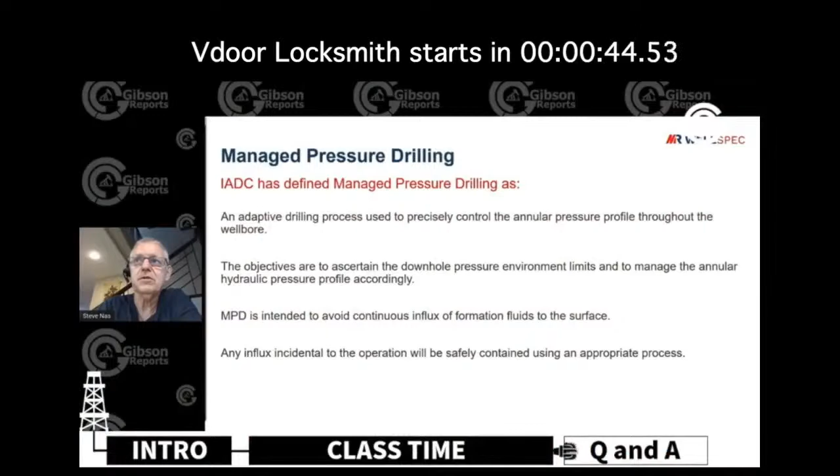The key is being transparent with our clients in this case. So tell them what happened. If we had a failure, tell them exactly what happened, whether it's our fault, whether it's whatever the issue was, we need to be transparent.

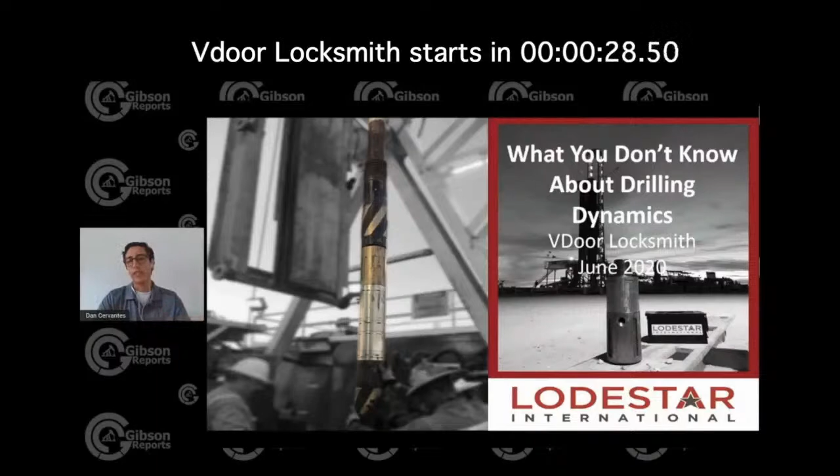I think it's very important for everyone in the industry to know what's out there and kind of what's happening downhole as well. I've probably worked on over 40 different performance limiters in my career.

Here's your new colors, here's your new thing. We don't do that at all. Here's the tattoo you need to get. Yeah, here's the tattoo. Sorry about the last one.

We used to fake that all the time.

All right, there we go. And Fred, thank you for coming on the show today, sir. Good morning, I appreciate being here, really appreciate the opportunity, David. Other than myself, you've been on the show the most. Well, like you say, I enjoy this. It's a great opportunity to share a little bit of practices, particularly things related to limiter redesign.

So as far as the limiter redesign, I know that you're going to get into that, but what's a high level elevator pitch for limiter redesign for anybody out there that's just now being introduced to it?

The principle is so common, and we think we do it all the time. You improve something until something limits you from improving it, and then you address the thing that's limiting you, and that lets you improve it some more. Well, what we tend to do is look at things that are limiting us, and if they still seem normal, we don't do anything about them. So I'm at max motor differential, I can't put any more weight on bit, and I'll drill with that same motor for a long time. Or I've got an auger that plugs at 100 feet per hour on an offshore rig, so I drill 100 feet per hour and don't change the auger. The day I do, I'm drilling 300 feet per hour.

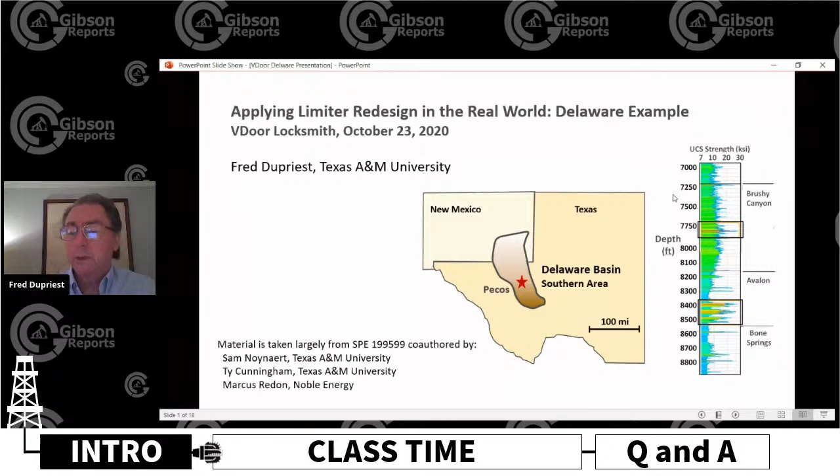But this was the prize when we started out: these hard streaks and the things that happen around them. So I'll be talking about the physics of these hard streaks some, because I think you need to know that to understand some of our conclusions.

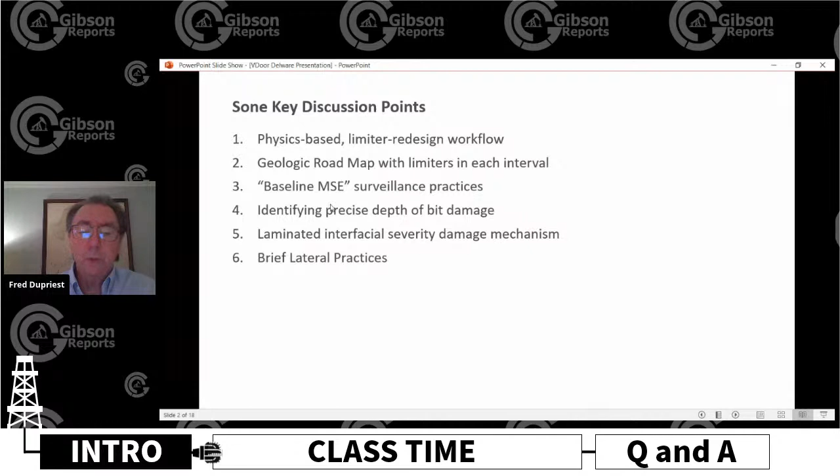So this is kind of an outline of subjects I'll go through—some of the key discussion points that we need to talk about in order to put a bow around this. So I start with the same slide, and I know you guys get tired of this, but it really is key to understanding what we're doing.

Physics-based limiter redesign is really wrapped around how bits really work. The way a bit works: if you apply weight on bit, the cutting structure indents, and then as you rotate, you remove the rock at that indentation depth. So weight on bit causes indentation—more weight on bit causes more indentation. That's why you drill faster. And rotary speed also increases how much you remove per minute.

At low weight on bit, we have some inefficiency, and I won't go into that, but we eventually get to a point where we actually do get a linear response between the weight changes and the ROP. So if I double my weight on bit, the ROP goes up proportionately. That straight line is saying to me, okay, I'm efficient—that's what an efficient bit does. So if I have a straight line response, I have an efficient bit.

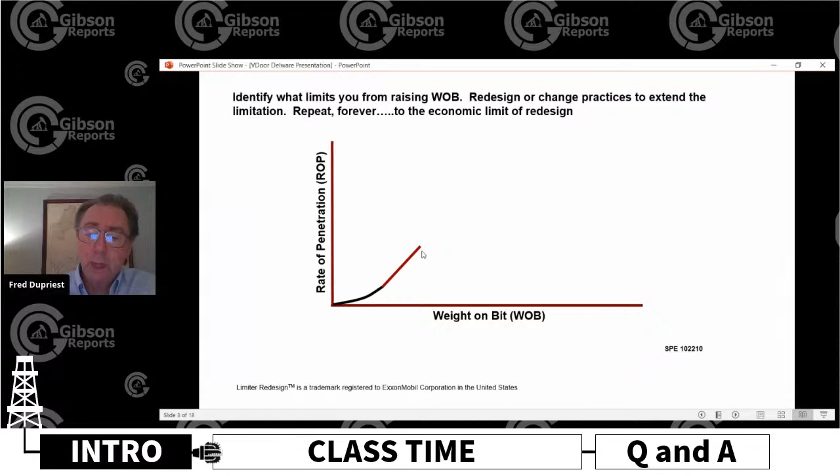We know at some point, keep raising weight on bit, and we don't get that response. That is not an efficient bit. So we know all the reasons for inefficiency—we've done lots of research, built practices. How does it work? What are the physics? What can the driller see? What can the engineer redesign? And we teach all that.

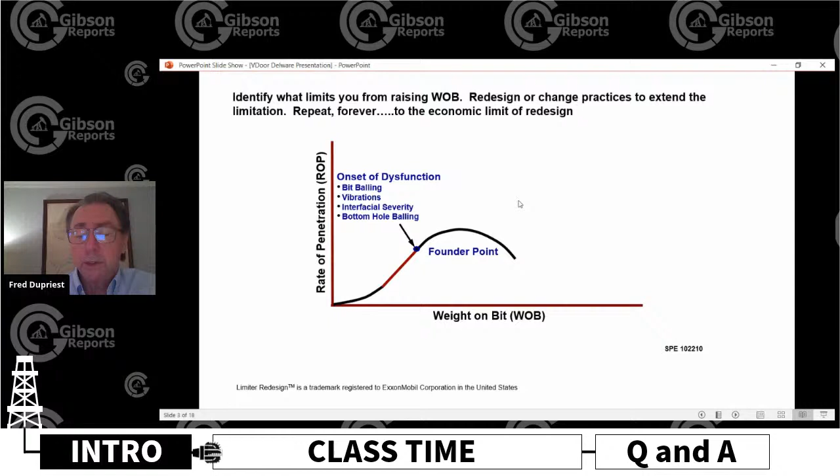And that's what every company, especially operators and general service providers, probably needs to be compiling in some kind of a very concerted program—an organized body of this—so they can teach an organized recognition and response. The bit should be doing this, which is beautiful. And we say, well, then to drill faster, you need more weight on bit. I need to change the weight on bit at which that dysfunction starts.

Now, this is kind of the classic shapes for bit balling. And what happens with bit balling: if you increase your hydraulic horsepower per square inch, you're still going to ball, but you might not do it until a much higher weight on bit and a much higher ROP. I had a case where we were balling at 120 feet an hour, changed that bit HSI, and we didn't ball until 500 feet an hour. So that is the idea of not fixing what's broken, but redesigning what limits me—that's a different question.

An example I use is, if you ask your wife what's wrong with our marriage, she might say nothing. But if you ask, what limits it from being better, she'd say, well, let me get my spreadsheet. So that's a different mindset.

Don't focus on what's broken. Don't think of it as broken. Just say, I'm limited by this, and dispassionately and non-politically record it, work on it, learn about it, go find some physics if you don't understand the bit balling, and you're off to the races.

As we do this, we can have all kinds of things that limit us, and everyone has its own physics. Some things the driller can see to decide to do a little better right now, and some things the engineer can redesign. The non-bit limiters, if you're offshore control, probably 80% of your footage, and the dysfunctions are a little bit less important to you.

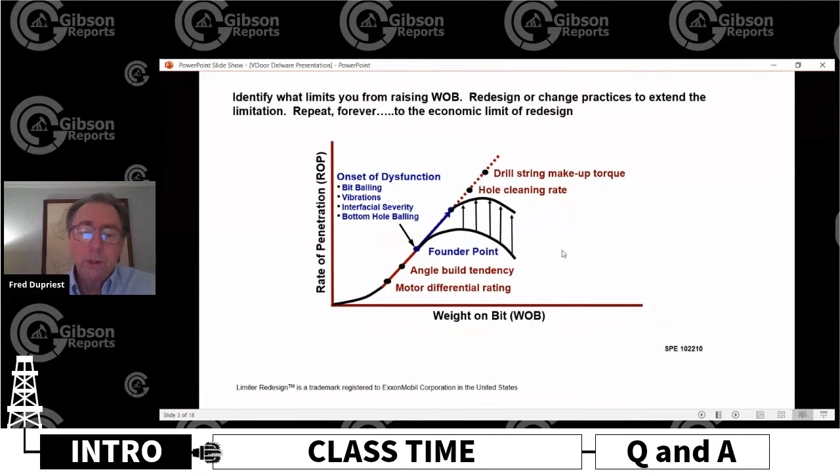Now, our management processes won't even focus on that. If something's not broken, the boss is not even going to want to know about it. So this is kind of a radically different thing to get people to go out and do this, just consistently and relentlessly, is a different way of working.

And that's where you start to see the need for a real programmatic initiative by the whole organization. Everybody has to kind of be part of inventing that, as it turns out. Somebody needs to pull the science and the practices and the physics into a pile, but you need to work with the entire organization because you're asking everybody to go to work every day and change how they work. And that's tough. We'll talk a little bit about that.

So this is the heart of limiter redesign. If I were in production, and we've extended this to other departments, I still need to find that magic question: what limits me from increasing the drawdown at the bottom of the well? Because I get linear production increases with that. And then from that, I just start increasing drawdown.

You get pretty profound and significant results because, again, I'm sitting there for years saying don't pull more than 1,000 pounds of drawdown on the screen in the Gulf of Mexico, and I just buy in and say that's normal. So it's kind of a general philosophical approach that tends to make a lot of money, but not an easy one to actually implement in an organization.

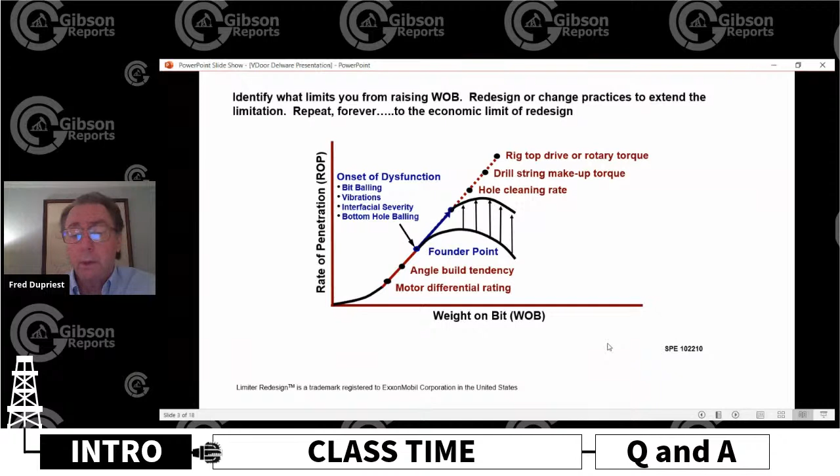Remember that if you have the bit off bottom, that's the first thing you've got to prioritize. So the model kind of accommodates reaming, circulating, and tripping. Each of those has its own question: what are you reaming? It has its physics, what caused that, and what can the driller see and decide, and what can the engineer redesign. They're no different. They should be part of your pile of redesign practices for all of these limiters that you run into.

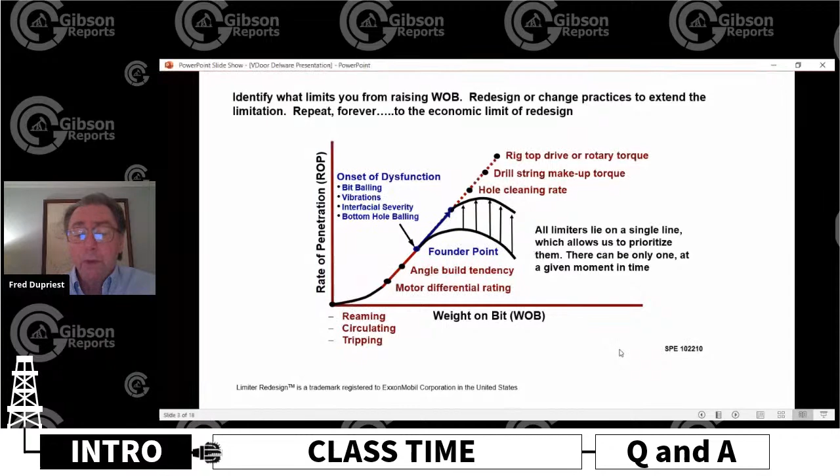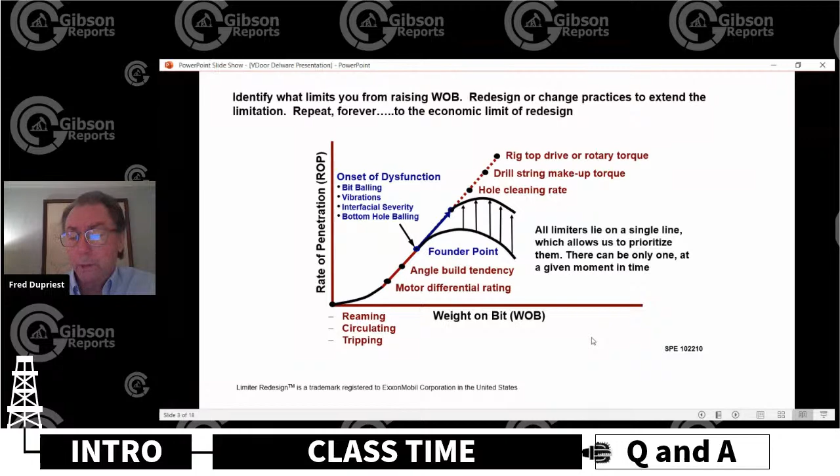The beauty of this is I can't be limited on any foot of hole by more than one thing. So that lets my organization, my well, my rig, my drill pipe, my hydraulic system, my rock, focus on what actually makes me money, whereas a researcher or a vendor has to generally try to make money. And it turns out there's a huge difference in the outcome in terms of performance if you can focus on every foot.

So I hope I don't lose anybody with all this philosophy before we talk some Delaware, but it's really important that your organization is not used to redesigning what's normal. And what we're really describing is a continuous improvement process, though I don't call it that because there's so much hard feeling around that term.

It is a plan, do, analyze cycle, like all continuous improvement processes. You plan to do something, you do it, and you analyze what happened, and then you plan the next one. What tends to happen is we plan, we do it, we learn a few things, and we make a change. One well, two wells, and now that becomes the new normal. There's so many things that just have become normal now.

If you look at learning curves in different fields, you'll see about a 10% improvement in a simple well—we don't have many of those. You'll see about a 30% improvement in a complex well before you hit that plateau, and that's where we have a lot of that out there. Yet there could be a 50 or 60% improvement if you would attack what's normal. So there's money to be made here.

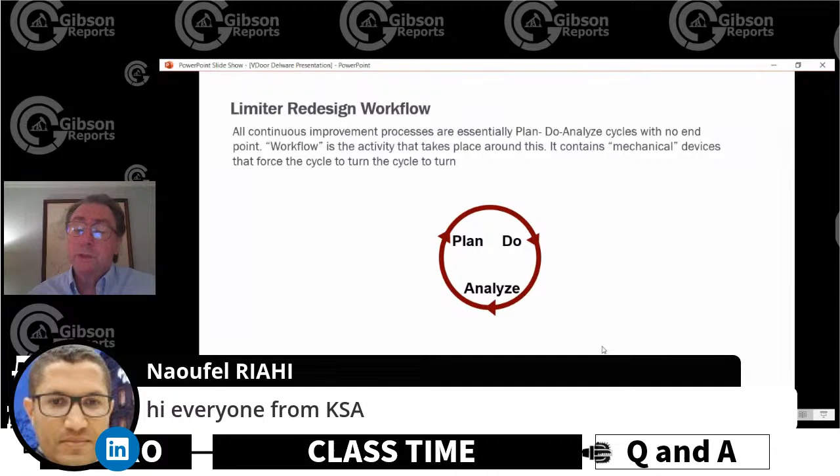The question is, how do you get your organization to actually go out and identify what limits them, and just relentlessly, with a lot of attitude, go after that for the next well, and then the next thing for the next well. Nobody's staffed to do that. And if it becomes my performance appraisal to do that, that's pretty scary. It's not scary to say drill a well and have no trouble, because I just keep doing what I've been doing—it drilled a well and had no trouble.

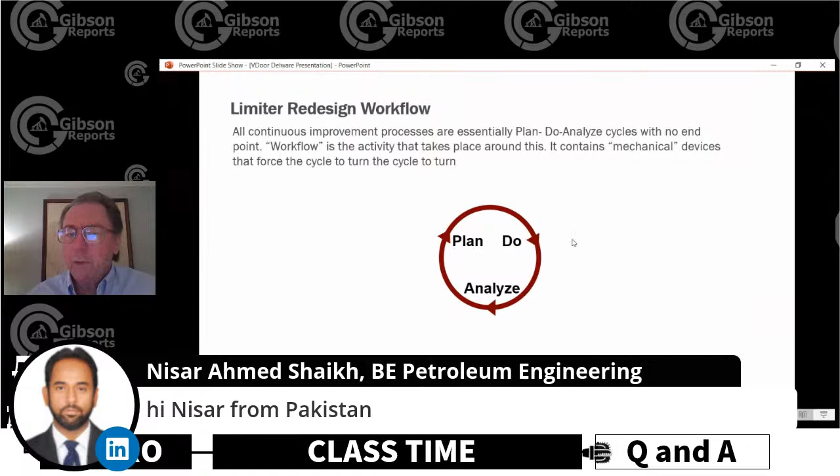So there's a lot of organizational dynamic here, and you're going to need what I call mechanical workflow devices to make this circle go round and round. By mechanics, I mean procedures that someone has to follow that just naturally gets them to redesign something.

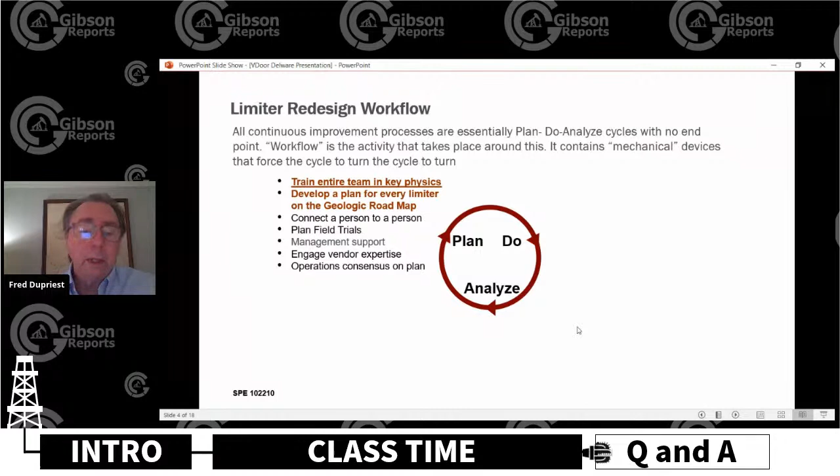A good example would be the simple step test while drilling: raise weight on bit in steps and identify what limits you, then document it on the daily report. You put that on the daily report, and in the morning meeting everybody says, okay, we're limited by this—what are we going to do about it? And the engineer at the table might say, oh, nothing. Really? No, I don't think so. So that's a mechanical device. Stating what limited me after a step test is what I call a mechanical workflow device, because it's almost physical—it's going to make something happen.

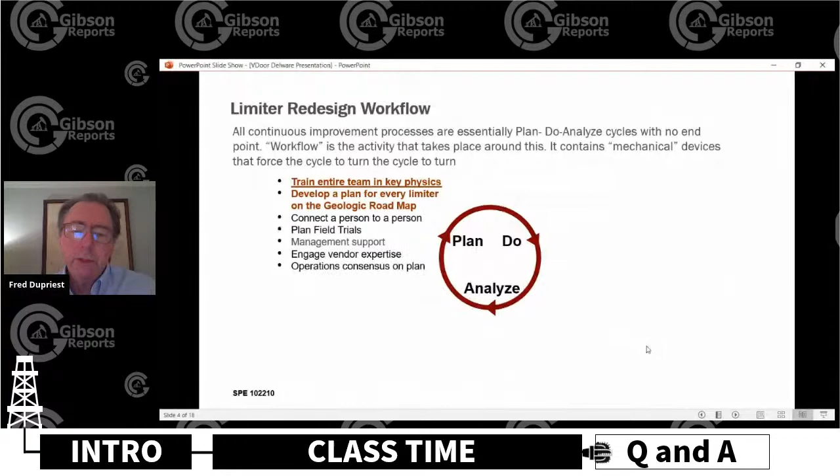So at every stage of the plan, do, analyze cycle in your company, your team needs to sit down and say, in our company, what keeps us from redesigning, from changing? You've got two things: how people work at the rig, and how we engineer change. In your company—because we all have different business models—some people have lots of engineering, some don't. Some have engineers at the rig site, some don't. So they move the responsibilities around differently.

Some of the things you often find really important—ten times more important than anything else on the list—you've got to pile up that knowledge and teach everybody on the team. And I don't mean just the engineer, I mean the driller on the brake handle, and especially the DD who doesn't even work for you. Because they're the ones sitting out there needing to identify and make decisions, and we can't do that for them remotely.

What limits you on a rig is always complicated by collateral things going on. You may think, oh, that's spitballing, let's do this—but there's a reason for not doing that that the rig knows about and you don't. Also, there's ownership and a human dynamic: the way we are in drilling, if the rig is not in charge of performance, you're not going to get performance. Most of you who have been around for a while know that.

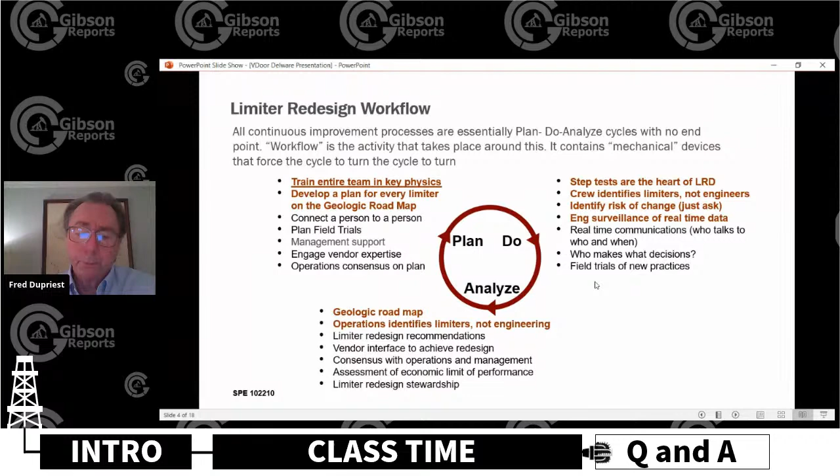In your training, I worked with a lot of companies. If you have a manager, anybody who makes decisions relative to drilling—might be a drilling manager, might be a VP—if they're going to make drilling decisions, they have to go to training.

And if they won't go to training, my advice is don't even start this stuff. I can tell you lots of stories about that, but if you start all of this and create this momentum in your organization, and your manager doesn't go to training, they can be the most well-intended person in the world. But the first time you have a bit failure and you know the physics, what needs to be done and all that, and your manager doesn't, then you're going to get called cowboy. They're just not going to understand what you're doing. And unless they understand, for example, that higher weight on bit does not wear the bit faster—sorry, it just doesn't, but how many people know that—these are really, really important things that you're going to have a hard time implementing as a team if your management, anyone close to decisions about your operation, doesn't sit in that room, go to the same training, or be on the same Zoom call. I really can't stress that enough.

Step test: the crew identifies the limiters, not the office. Identify the risk of change—really, really important. If you're an engineer and you want to change something, you ask the person doing the work: here's what I'm trying to change, how do you feel about that, are there any risks that scare you? If they give you a risk, you may think it's not a risk—well, that's not your choice. They gave you a risk. They're running the brake handle.

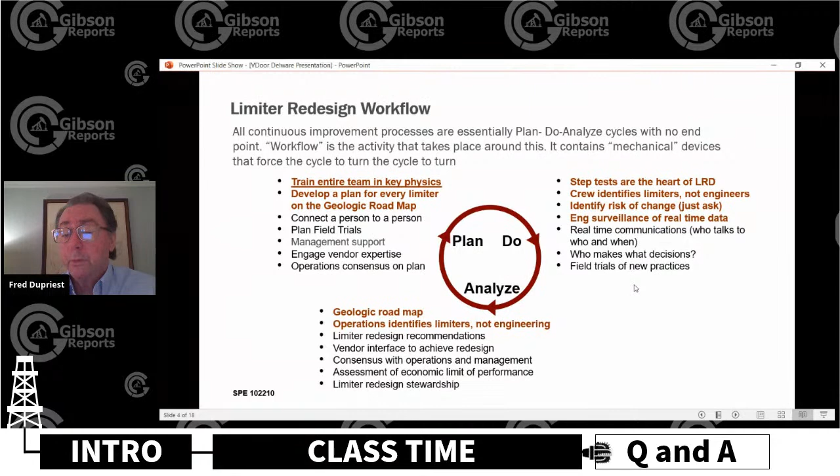Okay, so these are just some examples. Your company may be different because your business model, staffing, everything is different - wells you drill. But the key is that your organization needs to understand you're committing to continuous improvement, continuous redesign, and that the cycle has to change.

What happens with every single company I've ever worked with is they go out and get a 30% gain - I've never seen less - when they understand a few simple things, like higher weight on bit doesn't wear the bit. I've seen 50% in a matter of a month. So the problem is not getting that gain, it's that you then quit because it becomes a new normal. It is really hard, and yet you're sitting there limited when you can do much more.

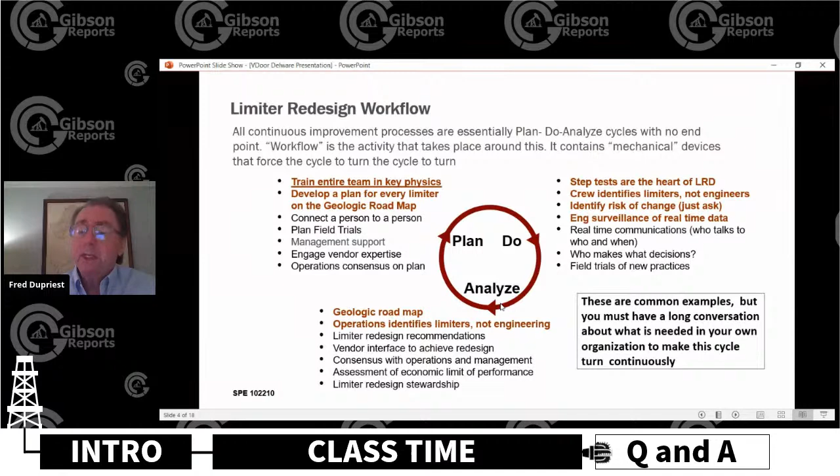And the key to getting more, and somewhat the key to even keeping what you got, is to make this circle go round. Okay, I need to move up. I'm moving pretty slow here, so I need to get this done pretty quickly, but this is really critical.

When you ask somebody to change, there are some steps. You can go online and read about change models - how do you get your organization, how do you get people to change? So there are some steps that I think are critical.

So your actual workflow, mechanical workflow, should always be, for any change, a field trial - even a new bit. It should be: what risk do you feel is out there? And as I said earlier, there's nothing more important than actually dealing with that.

And deal with everybody - does your manager see a risk and they're just playing possum in the corner until something goes wrong? Achieve clear management support, and I don't mean a signature on a paper. I mean make sure that management is particularly bought in that we're going to redesign, we're going to change. Our objective is change, not reliable, consistent delivery of the budget we promised, because that means no change, right?

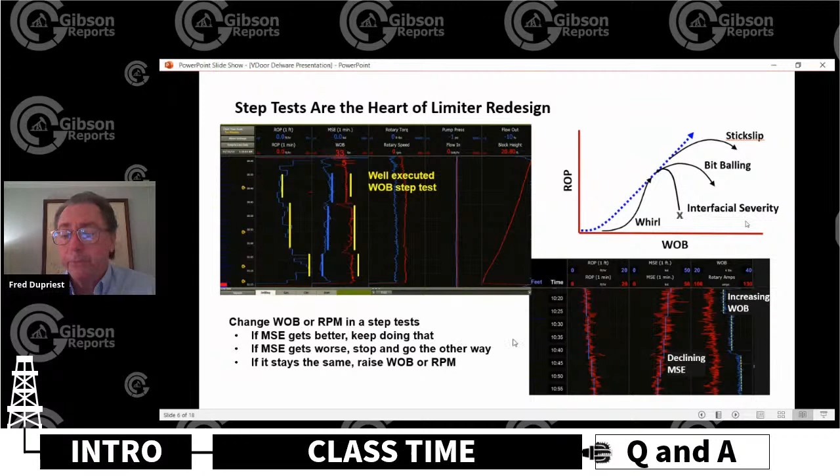Okay, so I'm going to take one of these physics things and demonstrate how we change the organization when we teach it over physics. I've said high weight on bit in itself doesn't wear the bit faster. The reason is that if I apply weight on bit, it indents until the force per area equals rock strength.

So I've got a 5,000 pound rock. If this is a small area and my force per area exceeds 5,000, the rock breaks and gets out of the way, but that gives me more area. So it will sink and dent until the force per area is 5,000 pounds on the rock, because the rock can resist 5,000. These two surfaces sit at equilibrium between the load per area and the rock strength per area. I'm simplifying things, but that's basically what determines our indentation depth, or depth of cut.

When force per area... well, if I raise weight on bit, what happens is I indent further to grow more area before I get that same balance point: 5,000 per area force, 5,000 pound rock. And that's why we get a linear increase in weight on bit if the bit's efficient.

But note the force per area on the cutter, whether I have 20,000 pounds weight on bit or 40,000 pounds weight on bit, the force per area on an individual cutter can't be greater than rock strength. It's still 5,000. So I'm not changing the force per area on my cutter, and my diamond is good for a million plus. So our weight doesn't actually wear our bit anymore.

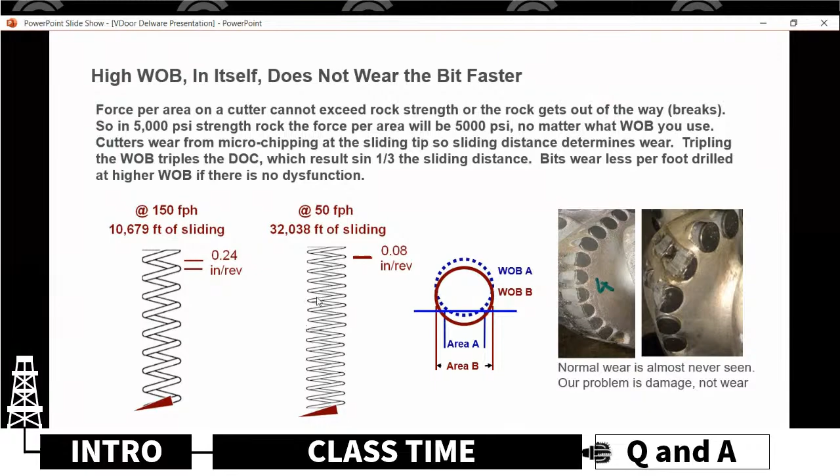So in reality, very high weight on bit reduces wear, normal frictional wear. Now, who knows that? Imagine your team now knows that, the ones who are afraid of just wear. It changes everything. It changes your conversation.

Now you're focused on dysfunction. Now you can say, I raise weight on bit in step tests until I see dysfunction. And you teach them all the different looks of dysfunction - this one right here is Whirl. You teach them these looks of dysfunction, and now they know, as long as I raise weight on bit and MSE is okay, I can keep raising weight on bit and nothing bad's going to happen.

And that's how you get to 65, 70,000 pounds. And that's what you should be running in a lot of your Delaware protective holes on a 12 1/4 bit, because when you do an MSE step test, you're not going to see the MSE come off the line, and you're making your bit wear less and less the higher the weight on bit per foot drilled that you use.

So let's go back and remember these things. You've been running 35,000 pounds weight on bit, and I want you to run 65,000 pounds. I want you to step test all the way to 65,000 pounds. The limiter is that the bit vendor said run 40,000 - that's my limiter, actually. I don't know why, but I'm not going to exceed what the bit salesman said.

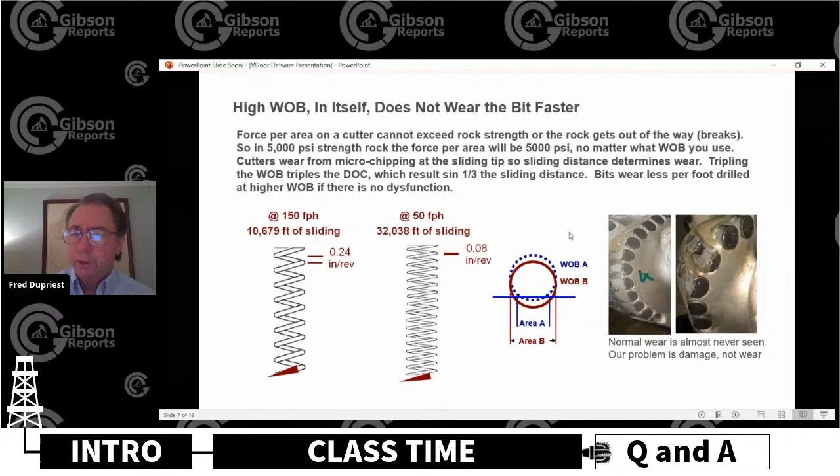Okay, so that's an example of one thing I might introduce, but you're going to introduce something different for every dysfunction you find, and maybe multiple things. And you need to respect that process, that 6-step process, and especially respect the concern of the person at the brake handle.

Teach them until they're not concerned, or do trials or do something. So we're going to capture our learnings from all these step tests into this geologic roadmap. So I know you guys can't read this, and I barely can. But in the Salado, that's an interval of salts and thick anhydrites that come and go. And what we learned from drilling this, analyzing MSE, doing step tests, was that the salts, you can run 90,000 pounds weight on bit.

I mean, nothing happens if your bit could handle it. And by the way, ask for the structural limit of the bit, not the operating recommendation. And you'll find 12¼ structural limits are all in excess of 70,000 pounds, and go there. So unless something limits you, like motor differential usually. So salts, nothing happens in salt, but we actually have a peculiar phenomena of bit balling in the anhydrites.

And what I need for that then, I know my science, I got the practices, I need bit HSI. And I'm going to crank up my bit HSI until, and see if I can move that flounder point with future step tests. And that's my metric. Did I move the flounder point for balling?

Not did I drill faster, because there's just too much going on with that. Balling in anhydrites is very little published on it, and I've seen it in 3 different places now, so I'm getting comfortable with that. And I've seen it respond to increased HSI.

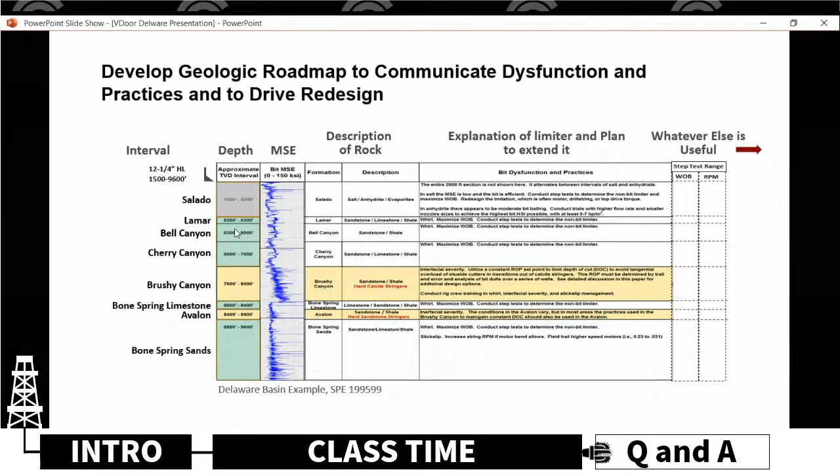You can still go to that weight on bit and that bit torque, and a faster motor. I'm going to get more ROP out of a faster motor as long as that other motor, my faster motor, will still deliver the actual bit torque that I'm actually drilling with. When I'm limited with drill pipe, then if it's a 30% faster motor, I'm going to drill 30% faster. Motor speed is the game that we're not playing enough of in the Delaware.

Now, I think that the Bakken is way into this, and they're running 1.0 motors and just tremendous speeds. Little different drilling conditions, but if you understand it from a dysfunctional standpoint, really not.

At least through most of the Cherry Canyon. Now, when you get to the lower part of the Cherry Canyon, we start getting into some laminar interfacial severity, probably rare in this area of the Delaware. Most of that doesn't start till about the middle of the Brushy Canyon.

So speed, there's not really a reason that I know of not to use more speed when I'm torque limited. But again, do your step test. Are you drill string torque limited, or are you something else? If not, don't go get more speed. If you can keep putting more weight on bit, it'll keep drilling faster, and you're not limited on that.

So every foot, every rig, your pipe, your well, your top drive, your hole size, you have to do this step testing and analysis with people who have been trained with this pile of information you put together to decide what the right answer is. And you can't look over the fence and say, well, that's what Joe's doing over there, or you don't want to.

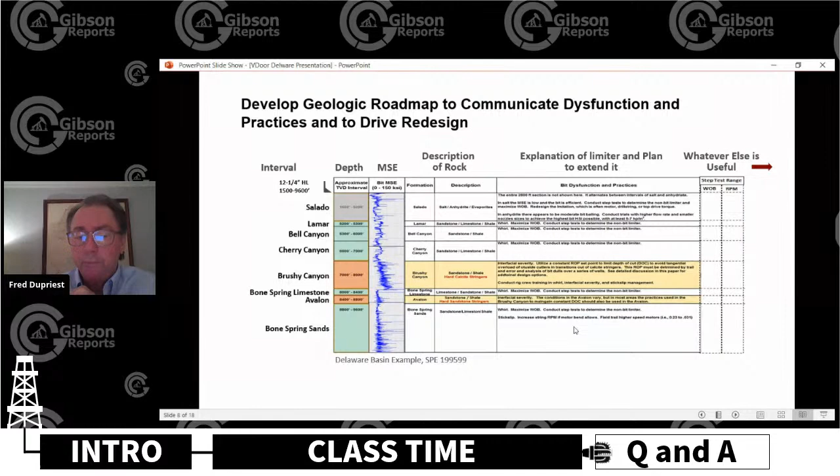What you see if you plot this, and what your practice should be, is you eyeball the downhole MSE and draw a line through it. The bottom of that curve will wobble around due to bit whirl. Basically, episodes of bit whirl will make it rise, then it'll fall back to its baseline. Rock strengths don't really change as much as you think. Episodes of bit whirl are the reasons we see big changes in ROP, and they're physical, physics-based reasons.

Basically, 1 foot of rock is rarely more significantly stronger than the next. So really, this should be a fairly smooth and gradually increasing baseline over depth as rock strength slowly rises. So anyway, just visually draw a line down the bottom of all this, call that your baseline.

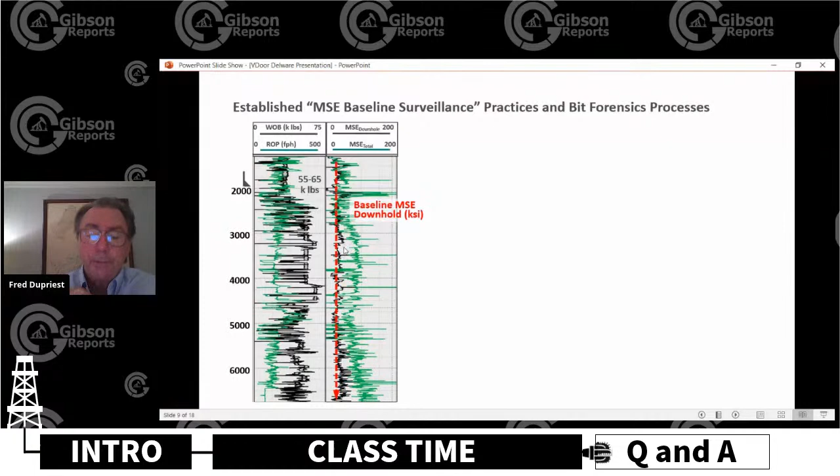Whenever your MSE goes down and touches that, that is as efficient as your bit is ever going to get, suggesting you're on that straight line in that plot I showed you earlier, or close to it. So that's my straight line, or that's my best performance I can possibly get.

Now, what happens if the bit wears is that now my vertical load is spread over contact area and I don't get depth of cut. It'll indent still until the contact area, force per area equals rock strength. But there's so much area that it's not going to be very much indentation depth when that happens. So now we're over here.

That should show up as a change. I should come off the baseline. If that has happened, I can never go back to the baseline because I can't get rid of all that contact area. So what you see here at the very end is that we had to pull this bit.

And the technique is then to zoom in and find the relationship, find this ramp where MSE started to move away from the baseline, but chase it back and find the exact foot where MSE started moving away from the baseline.

What this is saying is that you didn't have a bit of wear whatsoever. Nowhere, nowhere, none. This is a pristine green bit. And we've had lots of examples where we pulled bits and they were pristine green, hardly a scratch on them. But as soon as you come off that line, it's telling you something like this has happened.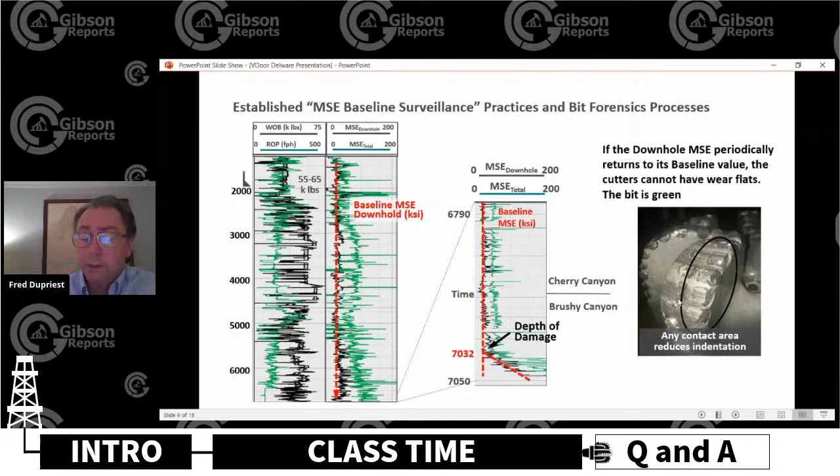So once you find that one foot, you go back on your time scale where you can zoom into seconds or minutes, and you find the actual event that triggered this damage. And you just got really, really smart.

You saw a large torque spike. You saw something that you can mitigate with bit design. You saw an operational mistake. We just kind of overloaded it with too much weight on bit, temporarily not paying attention or something. You will find something there. And now you've got either an operational practice you can change or maybe a design practice you can change.

You have something specific. So what we're doing with baseline MSE surveillance is first we're confirming that your rock does not wear your bit. And high weight on bit, this is 70,000 pounds right here. That didn't affect that bit at all. 60, 65,000 pounds, no effects whatsoever on that bit.

So you can use the MSE baseline behavior to teach your team it's okay, it's okay. See, now we've been doing this for 500 feet. There's not a twitch in that baseline. We're not moving. So that's one useful thing.

But the other useful thing really is to move from having to guess at why a bit wore out. And most people will think this happened over thousands of feet. Once you have an event that triggers a ramp like this, the bit rarely lasts 200 feet. It's usually more like 50 feet before you pull it.

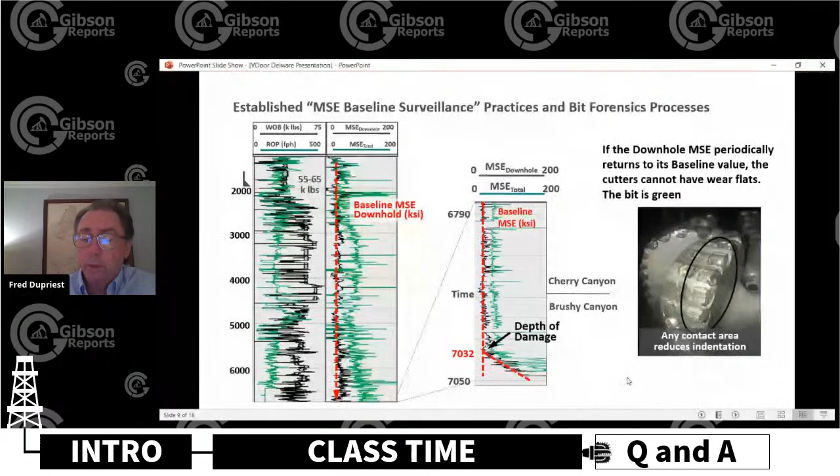But in hard rock, knowing where something happened lets you turn that plan-do-analyze cycle and move forward, because I can figure out what really happened and maybe make something different happen in the future.

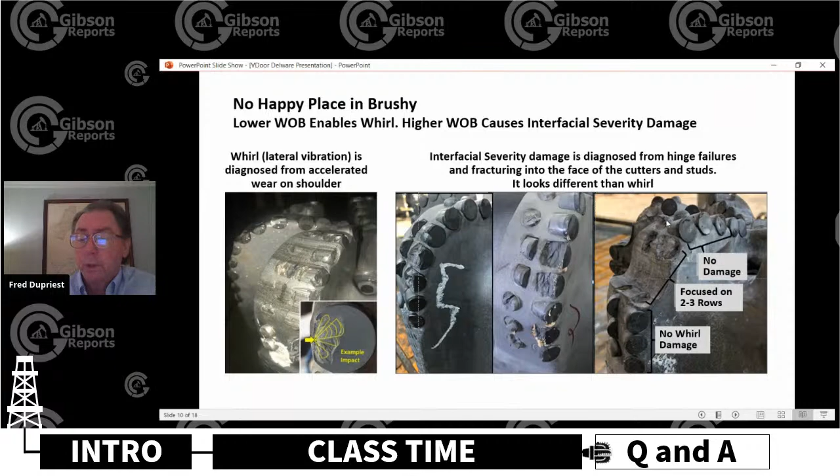So there's a couple of concepts, and from a research standpoint, what we tried to prove here was basically that there's a lot published about the nose being damaged when you go into hard formations. But how are we damaging the shoulder and not damaging the nose at all? And we knew things were happening around calcite streaks. So we went in and we said, okay, we get the nose thing. And Paul Pastusek wrote a really great paper on this a couple of years ago.

Really focused on nose failure. The thought is that we're not doing it going in, we're doing it coming out. When our nose gets into soft rock, we lose the support here, and these cutters take all the weight. So all this bit weight is focused on a few cutters, so they indent way more than they should, and now that torque overloads them.

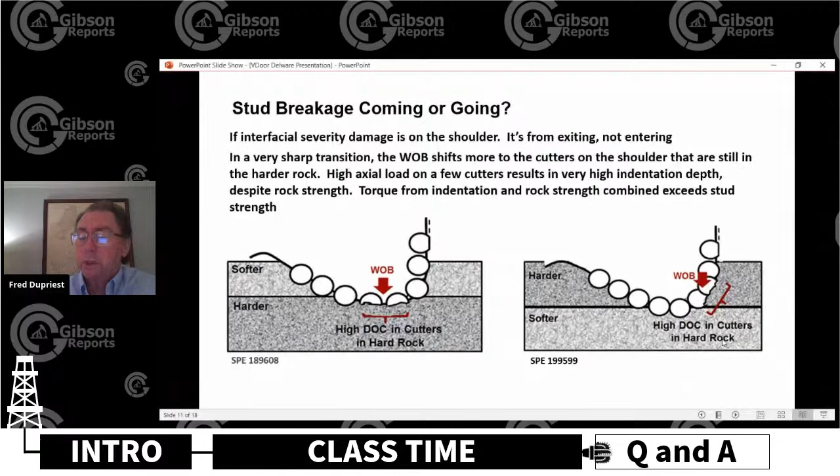Okay, so then what do you do? You get an idea, you get with experts, you get with bit vendors, you do modeling, you spend a year, you spend a lot of time, months, or whatever it takes. You set up field trials to try to understand this. And you try different things that would confirm it, like depth of cut control out here, or how you manage your weight on bit, or you start into a process. In this case, the answers aren't just lying out there on the table for you.

So that's what we did. And also be aware that on a bent motor, this side of your bit isn't even touching the hole. So when I say the shoulder loaded up, this loses load because the rock is soft, it loses vertical support and all the vertical weight goes out here. Not only that, but because it's bent, you get even more on one side.

How many times have you pulled a PDC with a blade broken or studs broken on a single blade, or maybe two blades on only one side of the motor or the bit, and you thought, how in the hell did that happen? Well, on a bent motor, you're only loading one side at a time if you're rotating the drill string.

So what would you do then if you had this kind of understanding, or were trying to test that theory? Well, stop using a 2.3 motor for one thing. If you get it down to 1.5, and if you're in your lateral, it should be a 1.2 or 1. But certainly get it down to 1.5, because we know we can build 10 degrees per 100 if we are willing to stabilize our motor.

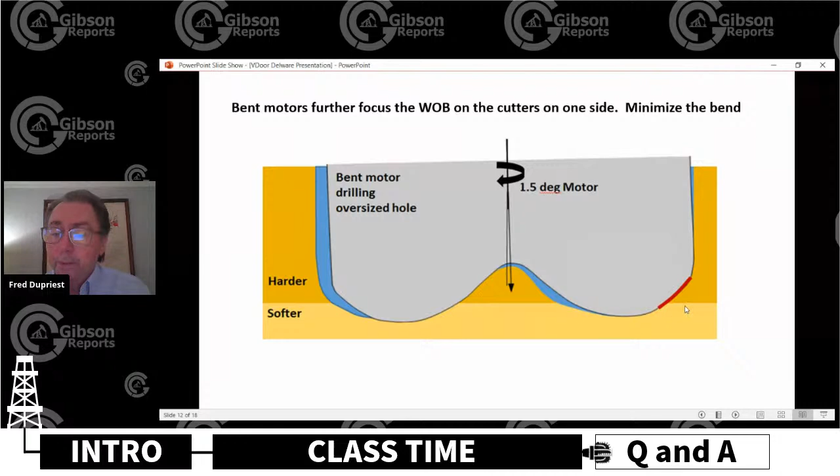So problems like this also have a bit design answer. Make the stud stronger. Well, do you have room in your blade? That's a real project with your bit vendor. But just make it stronger, because you're not breaking the diamond. Right? So there's another idea.

We also did work to confirm that our transitions leaving calcite stringers are very short, and going in are very long. One of the physical questions you asked in that previous picture is, how can I get so much load on the side and not on the nose? Well, it takes a really sharp transition, so the nose can be in something really different than the shoulder. And lo and behold, it turned out that we've got that, and you can also see it in the torque response.

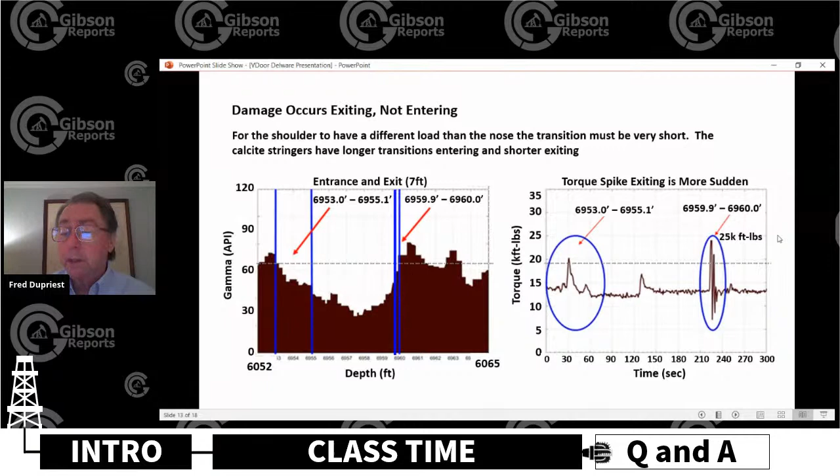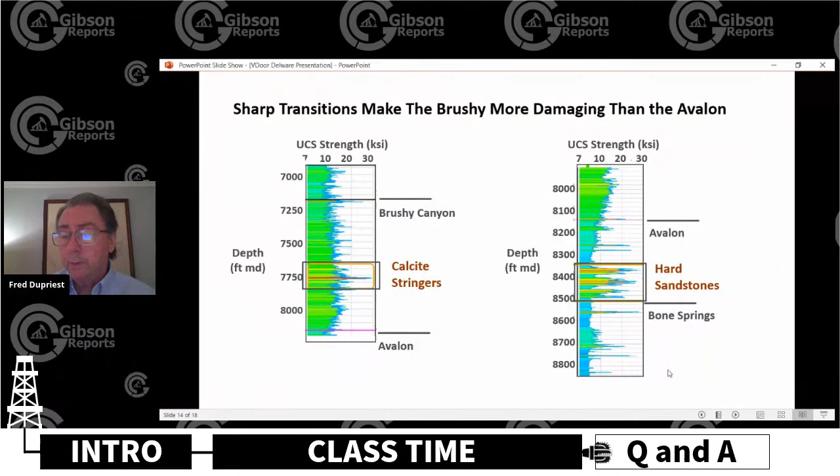The other thing this kind of solved was the Brushy Canyon, which is known to be really damaging. But in this area we drilled hard sandstone streaks that are just as strong as these calcite stringers, and these don't really tend to do as much damage. Now what we understand is the transitions in and out of these sands are quite long, so the face of your bit's not really in a different rock strength. But the calcite exits are really sharp. It's really the nature of how quick the transitions are that lets part of the bit face be loaded differently than another part. And so that's what's going on with the difference you see in damage between the Brushy and the Avalon. It's something to look for if you see similar kinds of behaviors in other places.

From there, to TD, from the base of the Avalon, MSE's low, uniform, hardly a wobble, no bit wear whatsoever. We continue to return to the baseline after little episodes of whirl, and we should be running 65, 70,000 pounds.

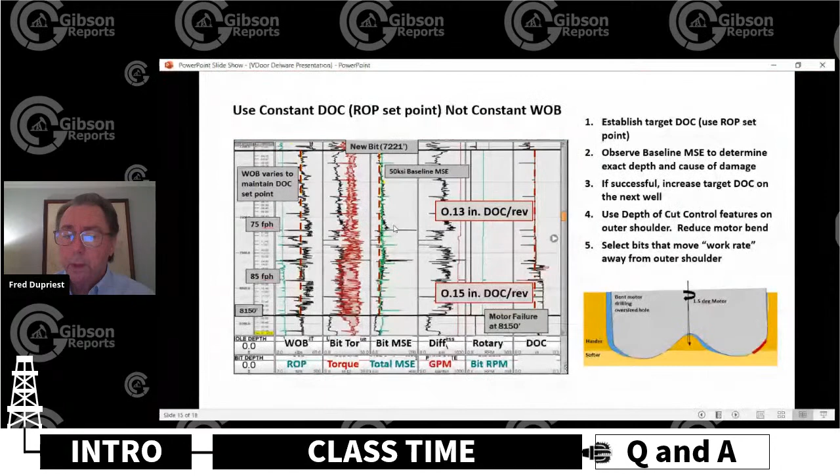At this depth, we start to see weight on bit become limited by stick slip. On some rigs, especially 5-inch drill pipe, the higher speed motor really starts to become seductive here, because it helps—let's not say solve stick slip—it elevates the weight on bit at which stick slip will occur, if I can get a lot more bit speed, and it drills faster. So that's one thing to start considering.

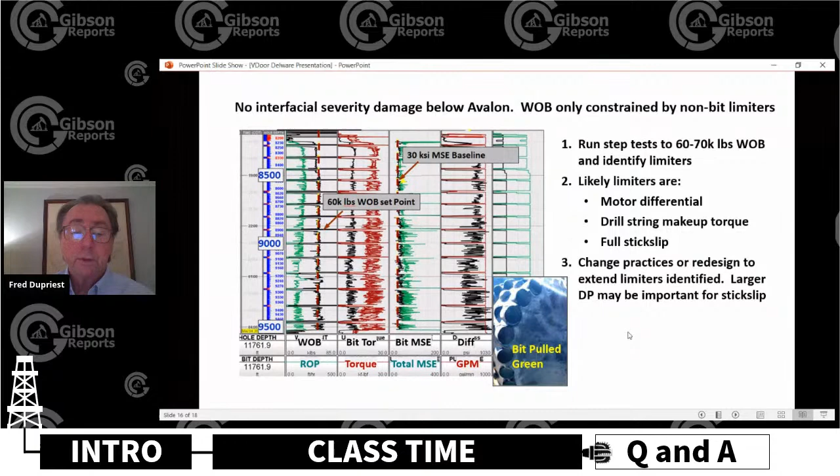This is a typical green bit pulled at the base, at the casing point. If you get a bit in, any bit that goes in below the Avalon is probably going to pull green, whether you run 45,000 pounds and drill slow, or 70,000 and drill fast. Some of the results: interval time was reduced by 28%.

In the case of Noble, the rig site team engagement was amazing. I think they really enjoyed the training we opened with, 16 hours over 2 days, though they did not necessarily enjoy that part.

It's a trick to give that kind of training. You can teach one crew right before they tire, but you either have to separate and go a different week with the second crew, or the people who were just up all night have to come into the hotel and go through class. Those are the kinds of decisions you have to make about how you're going to teach.

Getting people away from the rig in a room as a group, with your DD, your mud engineer, just everybody in the team you can get in there, is 5 times more effective than trying to teach on the rig. You've got peer pressure, the opportunity for disagreement to get sorted out, and the opportunity for a lot of agreement to happen, which is just as important. So how you train is a big deal.

Management must go to training, and it's best if you do it as an entire team with all the diverse people involved, especially your vendors, because of the role they play now. You're not going anywhere without them, especially your DD.

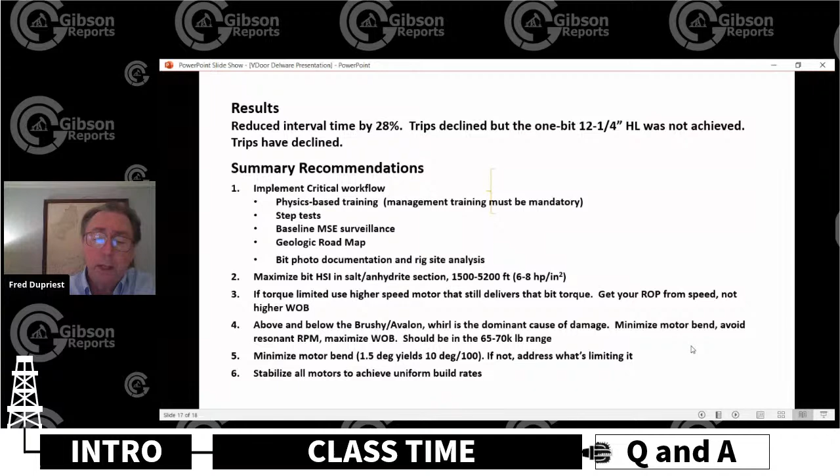If it's not, then somehow on your slides and rotates it's whirling and cutting the side of the hole—there's something physical going on that isn't letting it work. It's so important to get that down to at least a 1.5, because the level of whirl you're enabling is massively higher with a 2 degree or 2.3, and it has all kinds of collateral effects on your operations. And it can't get there without stabilizers.

Another alternative we found as a conclusion of the paper is that when you drill the Brushy Canyon, you're trying to avoid that shoulder overbiting. Some people try to limit weight on bit, but that ends up with episodes of real high whirl. It's better to limit ROP, because your EDR has an ROP set point. What you're really doing by limiting ROP is limiting the depth of cut at which the bit is traveling. It's a little better if you have a fast response with your rig control system to hold things that way versus constant weight on bit. It does a better job of keeping the shoulder from overbiting. That's been our experience, run constant ROP, and I've talked to other operators who feel the same way.

You still want to be increasing it, but now you're looking for the magic depth of cut. Can I sustain a 0.13, or can I push it up to 0.15? The only way to figure that out is to empirically do it from well to well. Just try higher and higher depths of cut and see what enables your bit to survive. Stronger studs if you can.

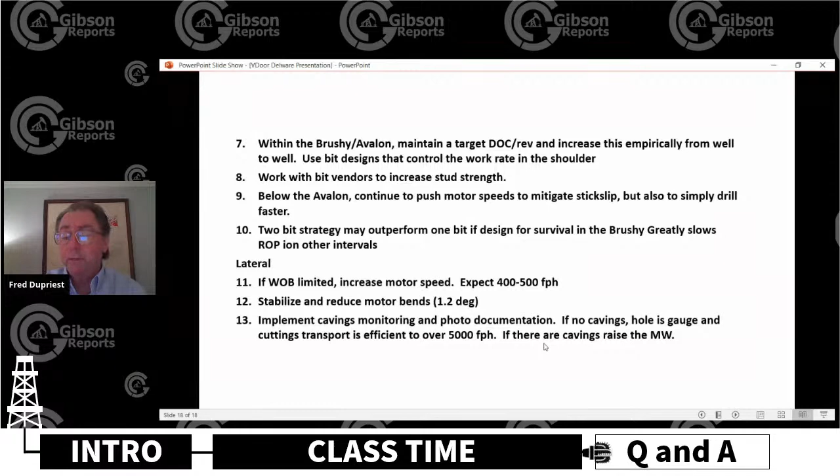So the key to drilling 400 or 500 feet per hour from a hole cleaning standpoint is drilling a gauge hole. And the way I know that is I watch what's on the shaker. I've done another talk here about cuttings monitoring and cavings monitoring. If you get your crew to watch for cavings, and they know what those look like, and you don't have any, you have a gauge hole. So you should push your ROPs up however high you want to - it's really, really hard to pack off a gauge hole. If you do see cavings, now you have to sit down and have an intelligent conversation, because it's transient hydraulic events around enlargements where cavings have come from that actually get us packed off. You may very well see that 500 feet an hour is not safe. So if I see cavings, raise the mud weight, make it gauge, and now 500 is safe. But if I can't raise my mud weight and I've got cavings, then you have to have a much more complicated conversation. Do a little experimenting.

Okay, wow, I just rambled on there, and I'm way over time here. No worries, Fred. No worries at all.

I do have a handful of questions if you are ready. You bet. All right, so here we go. Fred, can you please comment on the strategy to drill with constant ROP limit through hard stringers?

Well, I don't know if that question was posed before I answered it, but I think I answered that a second ago. It's about maintaining that constant depth of cut, because what's damaging us in the stringers is part of the bit face hitting the soft rock, where it just goes in, which moves all of your weight on bit out to the part of the cutters that can't indent, so it loads up out there. Then they take a much bigger depth of cut than the studs were designed for. So constant depth of cut, meaning constant ROP, is really about trying to keep the depth of cut constant. If I can keep it from taking a big bite, I may be able to protect the studs. The speed with which the rig can see things, make adjustments, the stored elasticity and weight you have in your string - all that's really complicated.

So it's not a very slick answer. A slick answer is a device right above your bit that does that for you, and there's some of that kind of thing being worked on. I don't know its status as far as getting to market, but you basically want a device that can react, analyze, and diagnose really fast right above the bit to stop the big depth of cut bite. I'm not sure that's out in the market right now. There are versions of that, but they may not be working great yet.

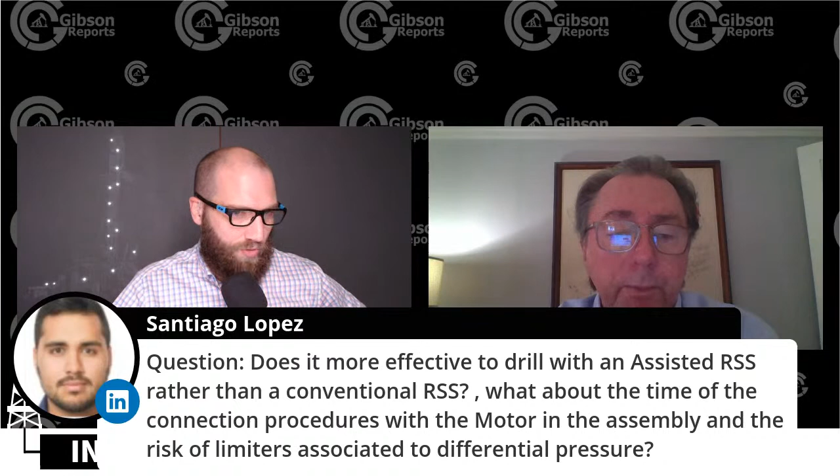We do have another question here. Is it more effective to drill with an assisted RSS rather than conventional RSS? What about the time of the connection procedures with motor in the assembly, and the risk of limiters associated to differential pressure? From Santiago.

It's funny when you ask multiple questions, I only remember the last one. But go for it, Fred.

The motor - I'm a proponent of, if the motor's rated for pressure, run it, not 80%, not 70%. If your vendor tells you statistically it lasts better at 80%, I'd say statistically I should go find another vendor. That's how I feel, because don't rate it for what you can't run. Now, let's be smart - let's be smarter than that. Let's ask what's limiting the motor from being run at 100, and you're going to find it has a big bend in it, or you're not taking care of running your string at non-resonant speeds, and you're just whirling it to death.

You don't really have a motor differential problem, you have a motor wear problem, and those almost always come back to whirl. So if that same motor does better statistically at 80% load, go find out what its problem really is and address those things. I think you'll be okay at 100, because motors get tested and they run at 100% for long periods of time. If they don't do that in the field, it's because something is happening to them in the field, and those are usually the issues - whirl is usually the issue. The design we put in there contributes to it. Slick assemblies, high bends, and running resonant speeds are maybe the low-hanging fruit for getting more differential in your motor safely.